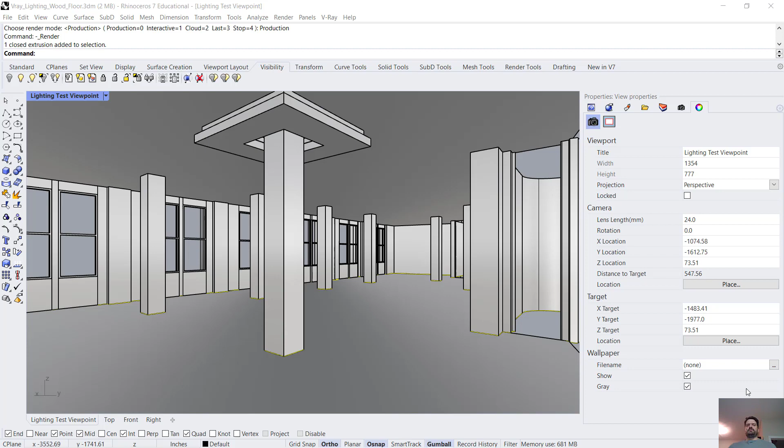In this video, we're going to spend some time getting comfortable with the Gumball as a controller for our objects. I'm in a model I've been using for some lighting tutorials, and we're going to use the Gumball to make a sculptural object, an arrangement of circular cutout shapes, flat disks stacked in space.

We're going to use the Gumball to maneuver those with some intention. I'm first going to select my floor and hide it, then make a circle with a diameter of, I think, 3 feet. That looks a little small.

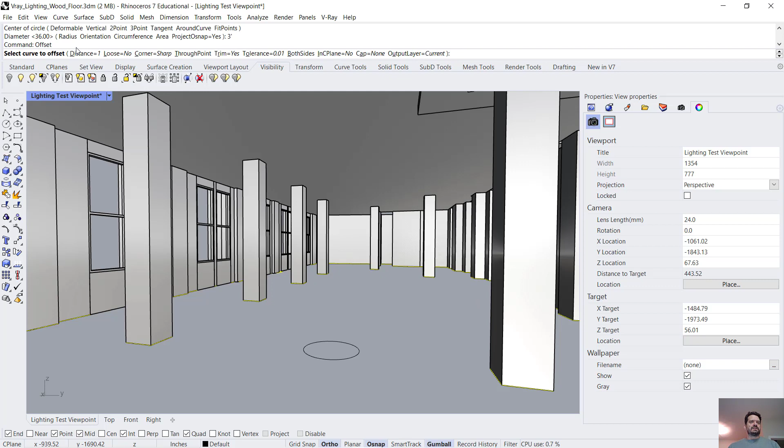I'm going to run my Offset command with a distance of 12. Select that circle, offset, run it again, offset. I'm just going to make a few copies here. There we go, like that. I think this is going to be large and wide at the bottom, get smaller in the middle, and wider up at the top.

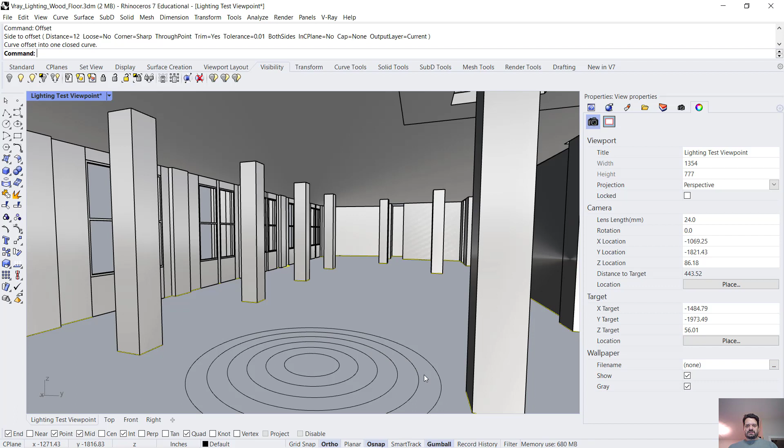So for the top, I'm going to select those two circles and extrude up by 1 inch. Importantly, my Solid option is set to yes, and what that gives me is a solid disk with a center hole cut out.

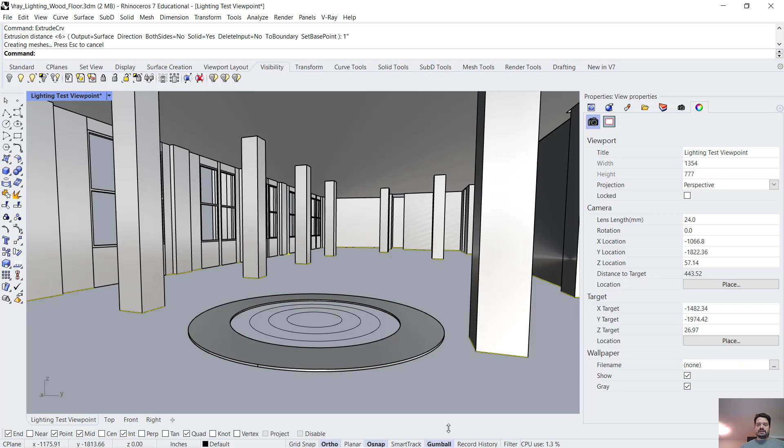At the base of my screen, I'm going to make sure my Gumball is enabled. I can see my Gumball when I select an object — this controller gives me a blue, red, and green arrow, as well as a green, red, and blue quarter arc, and a red and green dashed line with a square.

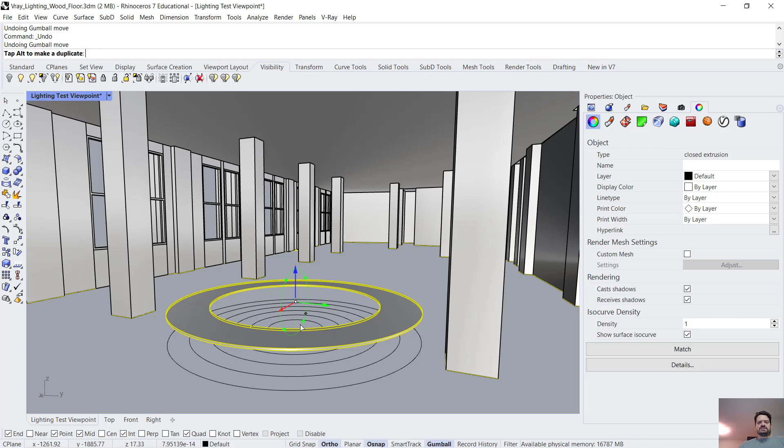My arrows allow me to move. If I select an arrow and click and drag on it, my movement is restricted to that direction, and likewise with my green and my red. My arcs allow me to restrict my rotation — so if I restrict my green rotation, I'm rotating on 90 degrees.

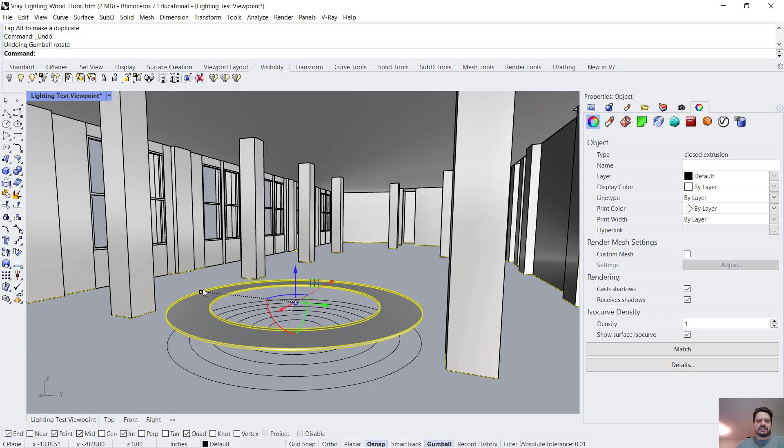It looks like my ortho is also turned on, so I'm going to turn off my orthographic snap. Now as I rotate, I'm locked on my green axis, locked on my red axis, and my dashed lines are for scaling, so I can scale in one direction.

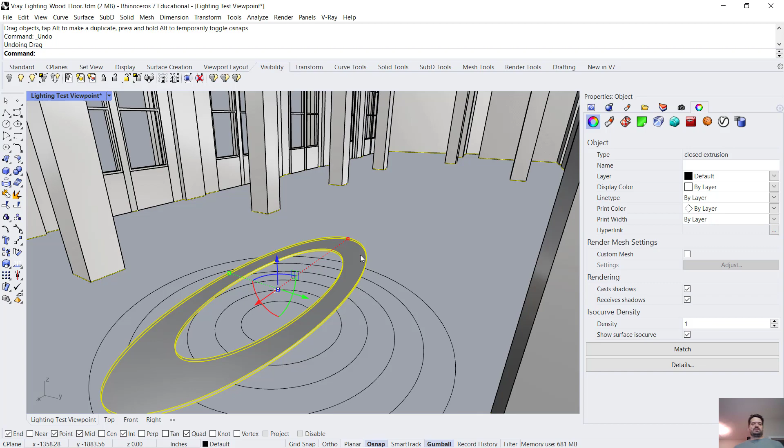Oops, it's a little hard to see. Let's maneuver so we can really grab it. Well, it's hard to select that with this model, but that red is also a scale. So I'm going to undo a little of this and look at moving this close to the ceiling.

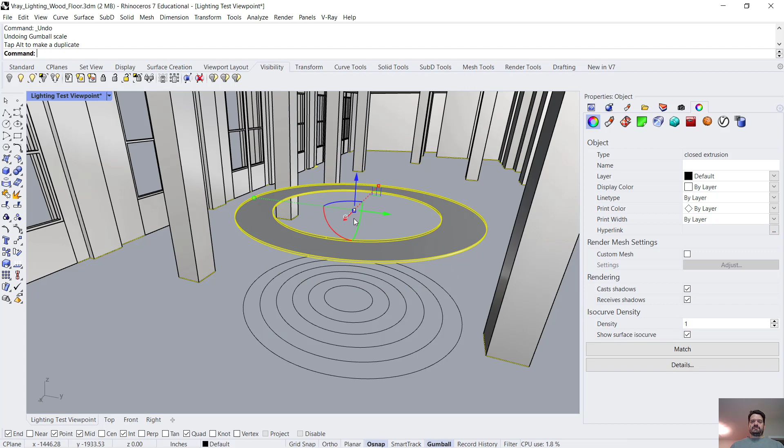Now I can click and drag as we've seen to move, but for any of these commands I can also click once instead of dragging, and then I get a numeric field where I can type in a certain amount — for instance, 12, 12. Let's just get this up close to the ceiling. That's about right.

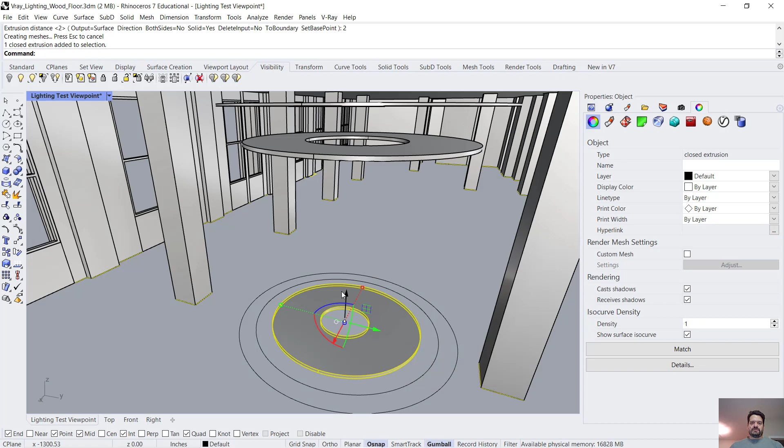And then I'm going to make this extrude 2 inches. I'm going to make a number of these, using that Gumball to arrange them. Maybe I'll make these extrude... there we go. And then for my very middle one, I'm going to make a solid.

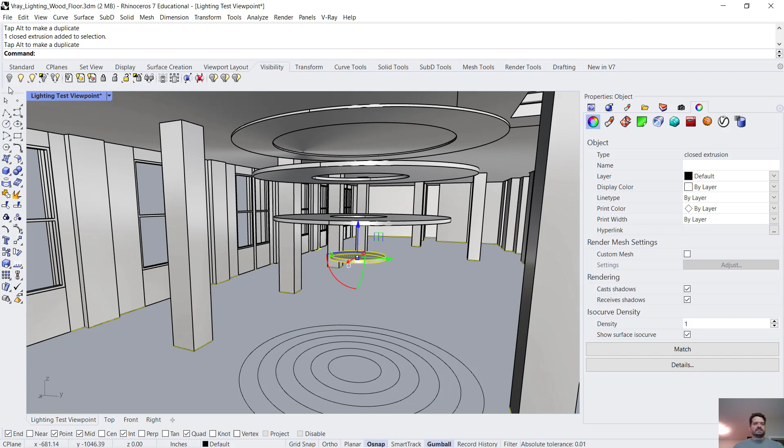So I can begin to arrange these. Maybe I'll rotate them a little bit in a moment, but for now I think I'm pleased with this. I'm actually going to switch out to a front view and hide some of my model — this will make it easier for me to see what I'm doing. So I want to use the same shapes below this middle platform.

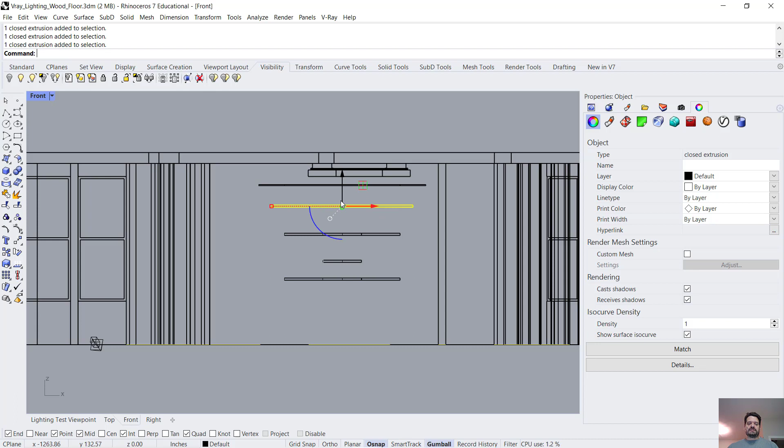If I hold down my Alt key on my keyboard and drag out to move that object, notice it keeps the original and makes a duplicate. So again, I'm holding down the Alt key, clicking on the green arrow, and dragging down. For the very top one, I'm going to do the same thing.

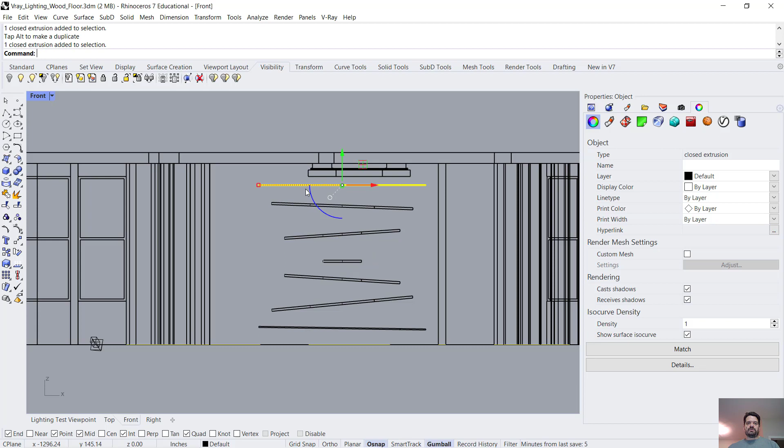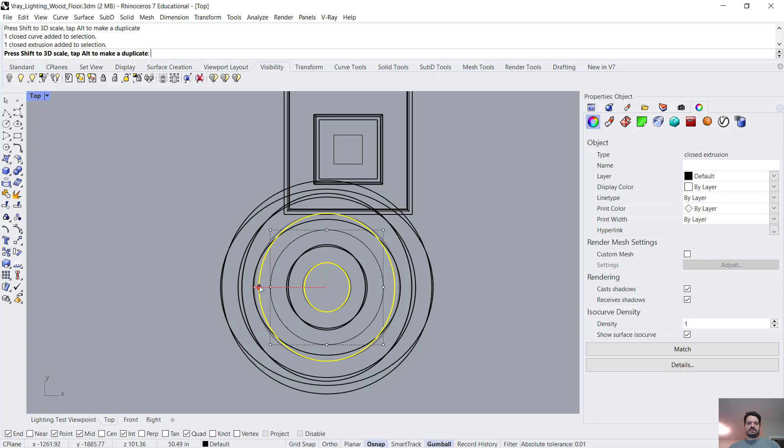Now I think I'm going to introduce just a little bit of fun rotation to make these all a little different. Maybe eventually we would make some sort of cable system that would suspend all of these together. And maybe I'm even going to scale them a little differently, just to create some fun differences in my model.

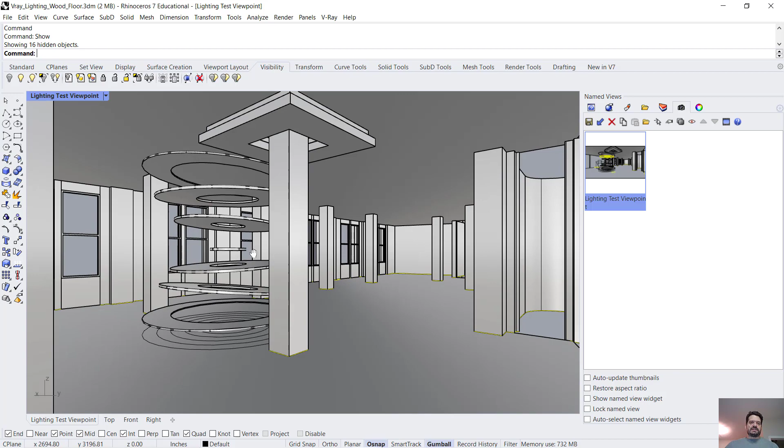Yeah, something like that. I happen to have a view built in that brings me back to a camera viewpoint. I'm going to unhide all of my objects, and I'm actually going to move my camera a little bit over like this, and let's define a new camera viewpoint. So in my named views, I'm going to put this new one and call it platforms.

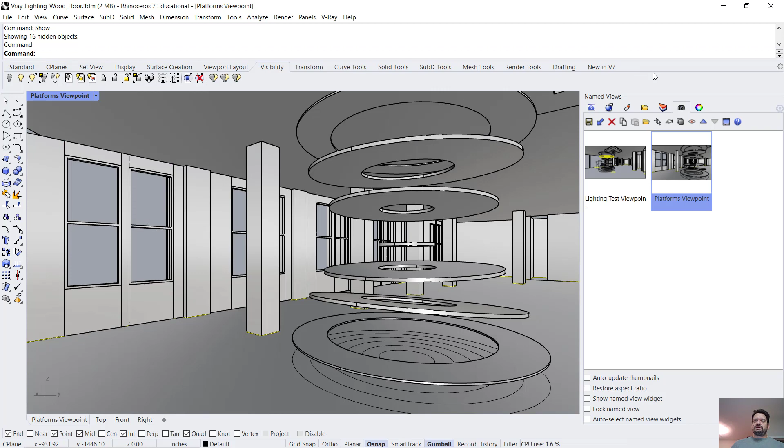Viewpoint. And now if I were to render — looks like I shut off my V-Ray menu, so I'm going to open my V-Ray compact menu and render. This scene is the same scene I was using for some daylighting and wood floor studies. I think in order to see these platforms, I'm going to put a lacquer material of some kind on them.

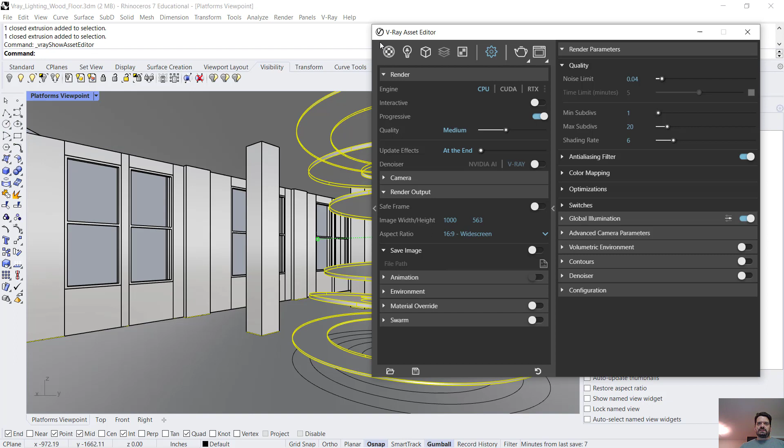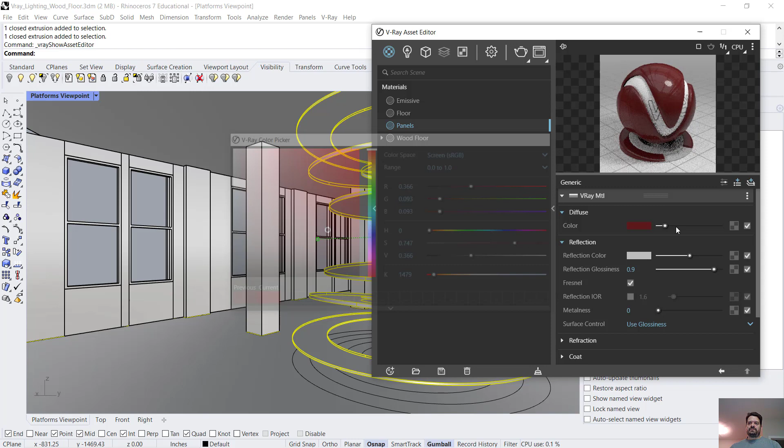So let's go to Materials, Create — maybe I'll just call them panels, apply to selection. Let's make it dark with some reflection, and let's make it kind of a dark red with some pretty sharp reflection. Now if I render, I should be able to see these a little better against the wood floor and against the white walls.

So I'm seeing these objects that I made through extrusions, but then I used the Gumball to move them up in space, to duplicate them, to rotate them, and arrange them in space. Eventually I could pin them with some elements that show them to be really hanging, because currently they're a bit just lost in space, hanging in space.

And I can see the materiality — that dark red lacquer is very deep in tone, which lets me see these against a white background. I'm seeing the reflection on the top surfaces reflecting the wood floor and the white walls. So that's a little bit of using the Gumball in Rhino.